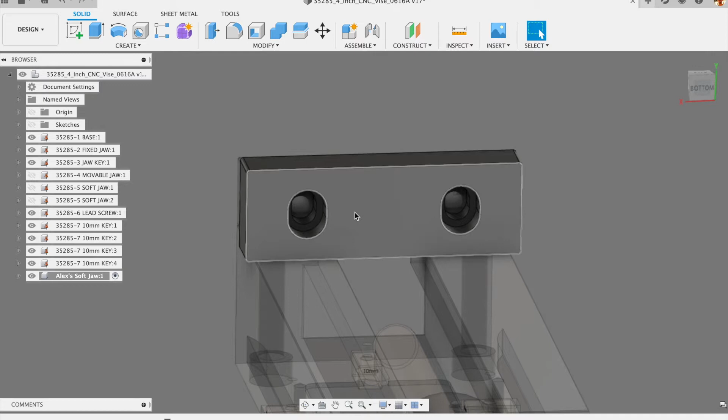Okay, this is the sequel to the previous video I made where I showed you how to design a vise jaw for your vise. And in this case, I designed a vise jaw for a 4-inch Tormach vise. So, next I'm going to show you how to do the toolpaths and post the G-code for this.

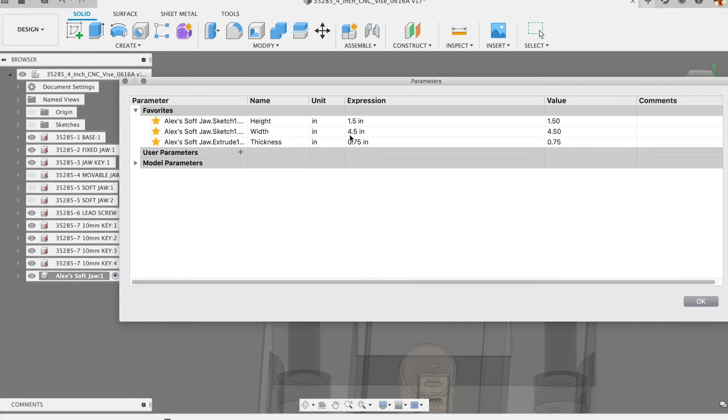So, let's see, there's a couple things since the last video that I want to change. So, modify, I'm going to go into change parameters and check the dimensions in here. So I changed the width to 4.5 inches. The height is 1.5 and the thickness is 0.75.

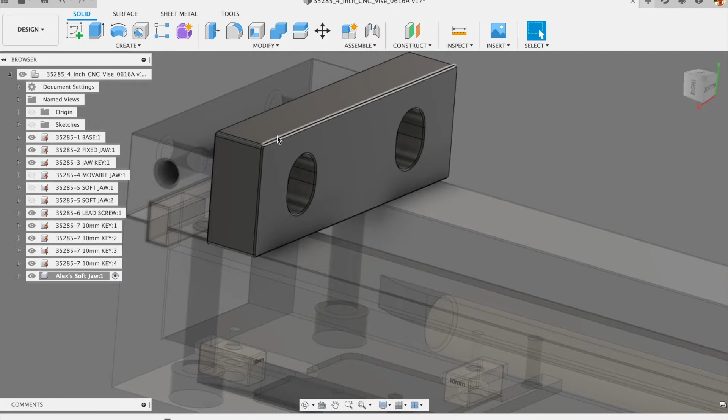And since I made that video, I also bought some material, and my material is 0.75 thick and 1.5 wide. So the problem with that I realized after the fact is you always need some material at the bottom to hold onto to machine your part. So that leaves me really no material to hold onto while I machine this part.

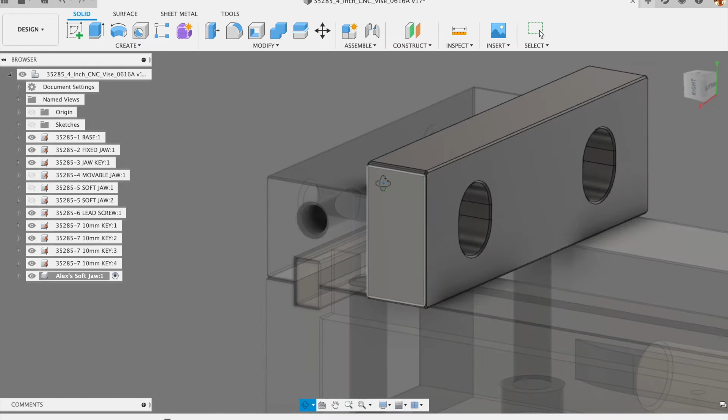So I decided rather than try to make this thinner, I don't really want it to be thinner because I want to maintain rigidity and make sure I have some material to cut into later. So rather than make it thinner, I decided it'd probably be best to just eliminate these corner radiuses, leave a saw cut at the ends, and then just make it not quite so pretty and perfect looking.

So it'll be rough saw cuts. It's going to be rough extruded material on the top. And later I can always mill that down flat while it's on the vise. So I'm not too worried about that. So what I'm going to do here is I'm going to back up my history timeline to get rid of both those things. And then I'm just going to add a chamfer.

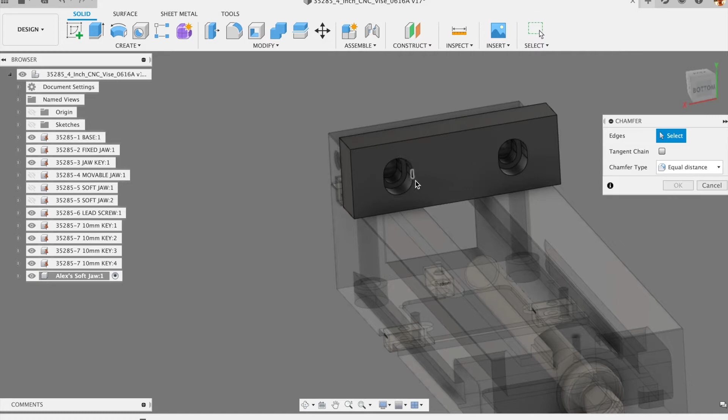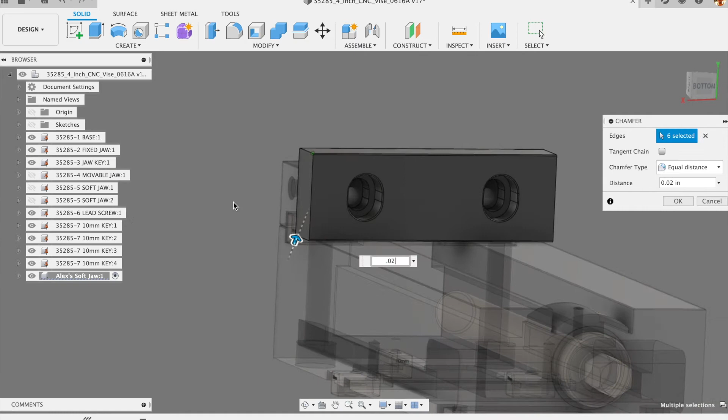So I'll add it back to these edges. And then 1, 2, 3, where is that? 4 edges. And you can make that 0.02. So that should work. So I'll still face this surface and the back side just so they're parallel to each other. I'll hit save, and I'm going to go into manufacture workspace.

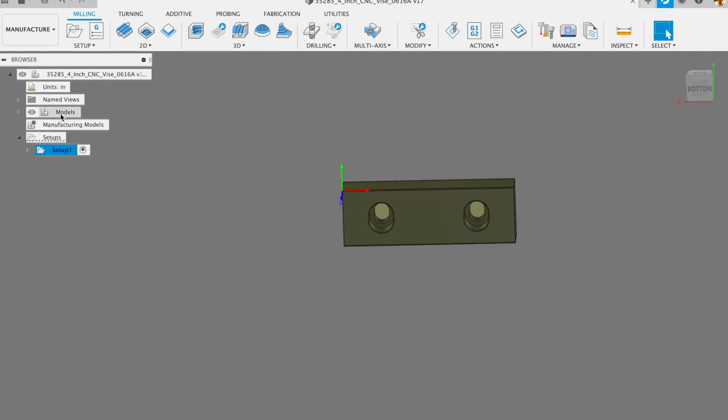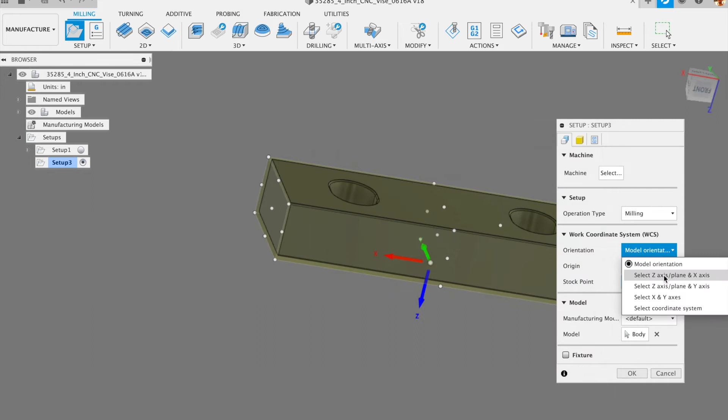So I already have a setup here, but I'm just going to create a new setup to start this from scratch. So you can immediately see my Z is pointed down and I want my Z pointed up. So it's pointed down because that's the direction that the model was built in. But I'm going to change it. Instead of model orientation, select Z plane and X axis.

So this is purely for the direction, the orientation of the axes, not the location. So I selected the face to make Z up, and then I'm not even going to select anything for X. I'm just going to flip my X axis so it's the way I want it.

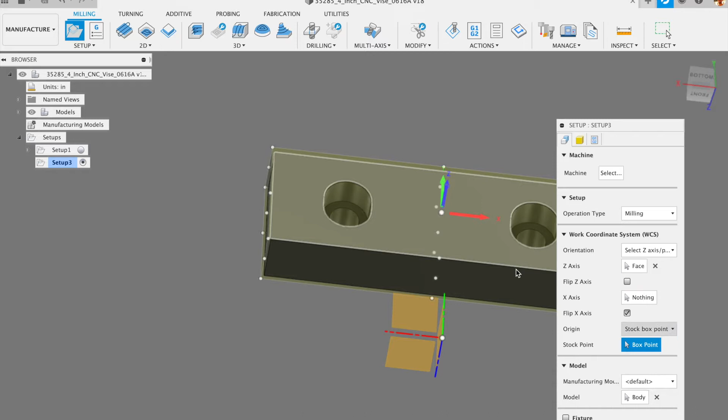Next, we have origin, and on this, I put a lot of thought into whether I should do model box point or stock box point, and that's basically either this point, which is the corner of the stock, or if I do model box point, it's the corner of the finished part. So on this one, I'm actually not too worried about it because I'm just going to say the stock is the size of the model.

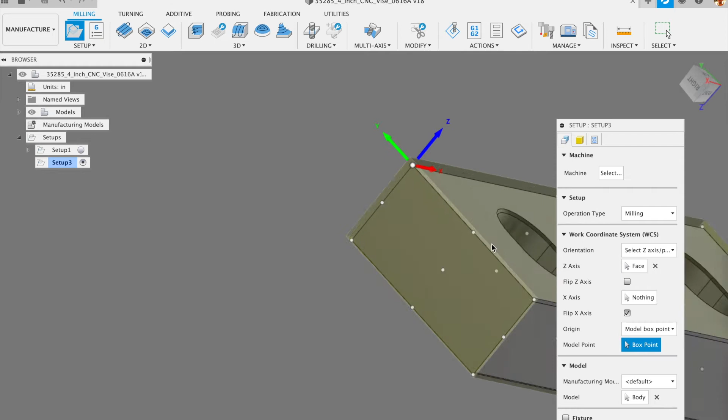Now the finished part is going to be slightly thinner than 0.75 because I need to have just a little bit of material to face off. So I'm thinking it's probably going to be 10 thousandths on either side, might have to be a little bit more than that to get a fully clean face, but I'm going to try 10 thousandths. But that does not affect how we model this or how we do the toolpaths, but it will affect how we run it in the machine. So that's to worry about later.

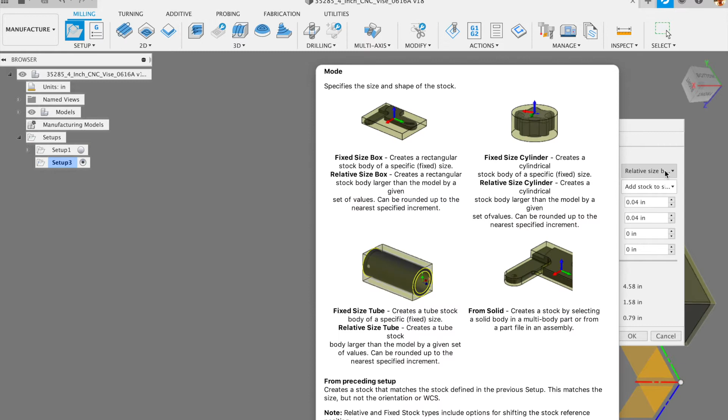So I guess I'll keep it relative size box, no additional stock. So the stock is the exact size of the model, which is these numbers here. Hit OK. Hit save. And as you can see, I'm on setup 3. I've messed with this a little bit.

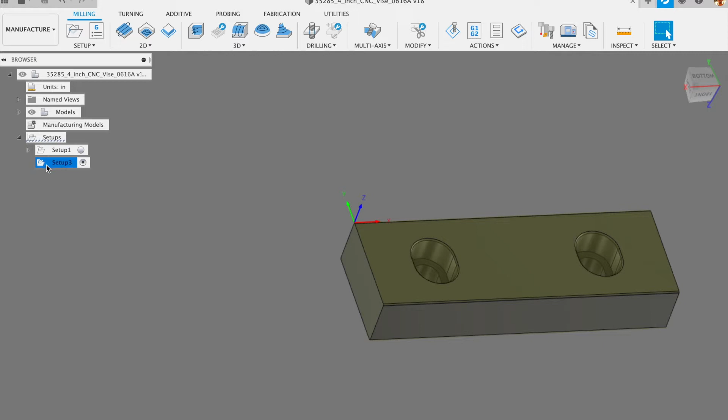So the first thing I want to do is face the top. And I'm working with a Tormach PCNC 440. If you're not familiar with that machine, it's got about the same footprint as a refrigerator.

So it's a really small machine. The nice thing about it is it goes up to 10,000 RPM. So for a small cutter, which is what I'm mostly using, I can still move pretty quickly through material.

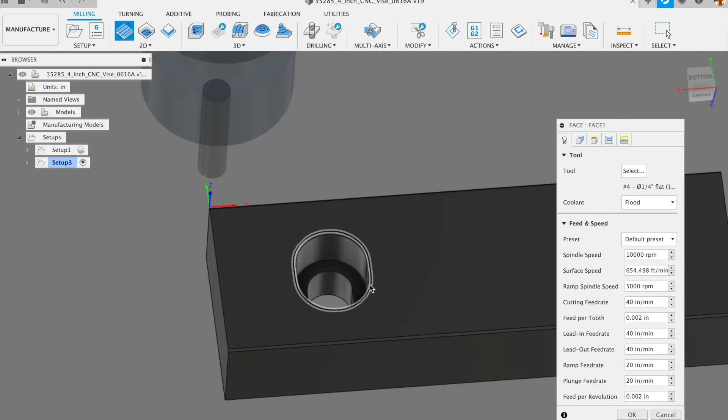Normally for facing, I'd want to use the biggest end mill possible. But for now, I'm just going to grab this 1/4 inch. Normally I would use the 3/8, but just since I happen to know that the 3/8 is not going to fit very well down in this bottom hole, I'm just going to see how the 1/4 inch does and check out how much time it takes. I'm not as worried about time as I am about convenience and having a good part.

Another factor, this is totally something about my machine, but I don't have an automatic tool changer, so I'm doing manual tool changes. So if I can save myself a tool change, that's kind of nice, especially if I want to run several of these. So geometry, if I don't select anything, it defaults to the entire stock model, so I'm just going to leave that.

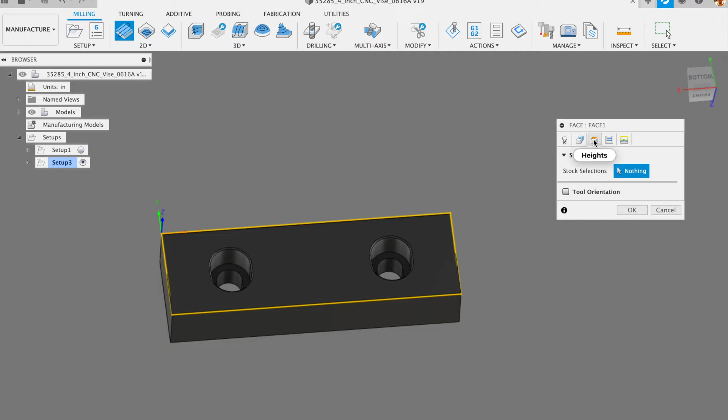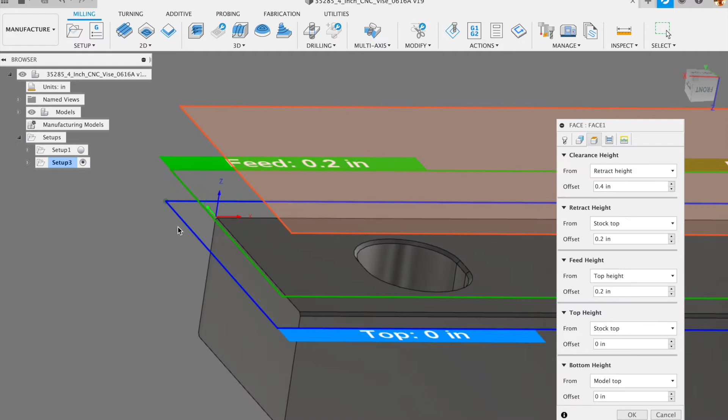Heights, the bottom height is the lowest my tool is going to go. The top height is where the material starts, so I'm going to leave both of these where they are. Even though the stock top is the model top, I'll take care of this. When I touch off the tool in the machine, I'm just going to subtract 10 thousandths and make sure that pass has enough material to clean up and leave a clean machined face.

Passes. Okay, this step over is good. So the step over, I want to make sure that's less than my tool diameter. So it is, because I'm using a 1/4 inch. Again, you might think I'm crazy for using a 1/4 inch to face a part like this, but it is a pretty small part. Let's see. I think everything else is good.

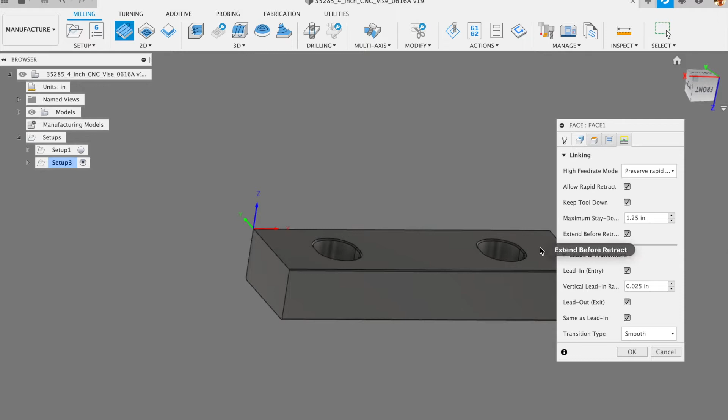Oh, I like to hit this extend before retract. And that extend before retract just is here. It makes sure, if that's not clicked, it'll lift right when it gets to this point. So I want it to fully leave the part before it retracts up. That looks pretty good. One other thing, I'm going to go back in and edit this.

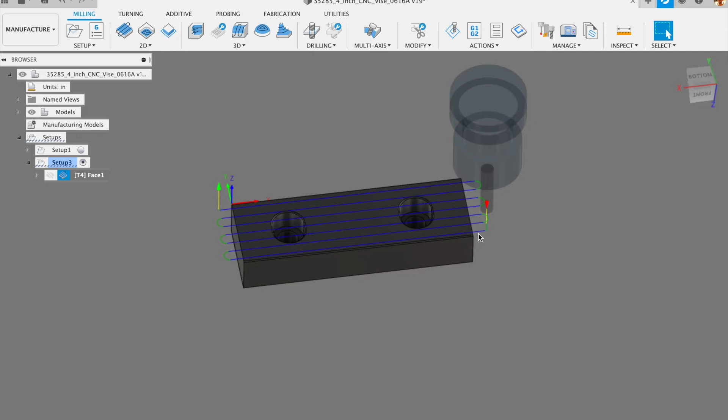I'm just going to do this pass extension. I'm going to do 0.25 just in case I cut my material a little oversized. I'm not going to do this super precisely, so if my material is just a little oversized, I don't want it to come down and plunge into the material. So I don't anticipate it's going to be this much oversized, but that little bit of feed move is not going to add too much to my time. So that worked there.

Save. And now I'm going to use 2D adaptive clearing. So 2D adaptive clearing and 2D pocket are both roughing toolpaths. And whenever possible, I use adaptive clearing because it gives you a much smoother toolpath. It lets you go full depth, and it guarantees that you're not going to exceed your maximum step over.

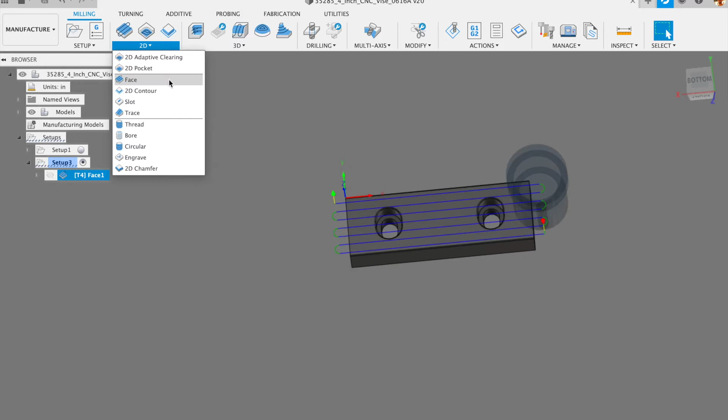Alternatively, Pocket is very similar, except sometimes the tool will go full width into the material. It's not as concerned about maintaining a consistent step over. So 2D Pocket, you have to be careful. You could break your tool if you're not careful how you use it. 2D Adaptive, you can be a little bit more careless and know that your tool is not going to break as long as you're putting in reasonable numbers.

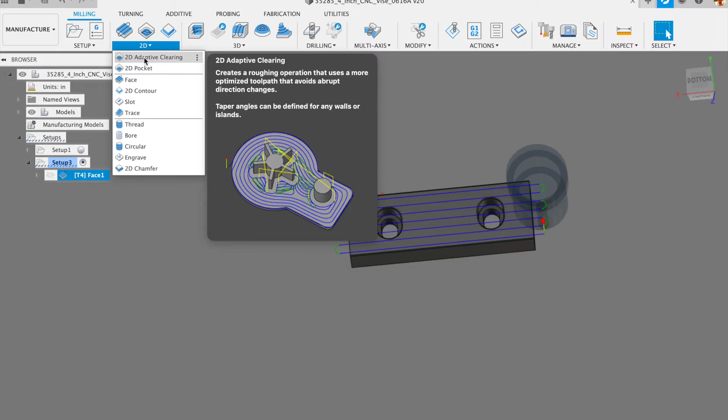So there's also 3D Adaptive and Pocket. Anytime you have a really simple geometry like I do, as far as vertical walls and a flat bottom, it's better to use 2D. It's just going to behave more predictably. So I could use a 3D adaptive, but it's going to be trying to look at other stuff that I don't really need to worry about for this simple of a pocket. So again, same tool.

All my speeds and feeds are based on the machine I have. So 10,000 RPMs. This will all depend on your machine, but if you have 10,000 RPMs, you should use that for a 1/4 inch carbide end mill.

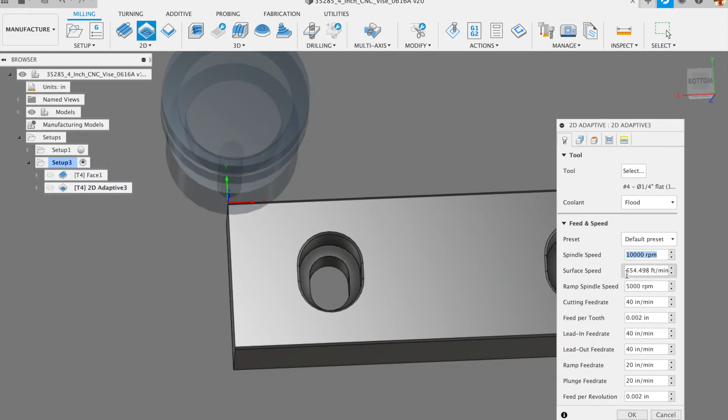Okay, pocket geometry. So I'm going to select, let's see, if I select these bottom areas, I think that will work. Heights. So the important one here is bottom height. So from selected contours, so that's where I selected down here, offset 0 inches. So that's how deep I want my tool to go, which is correct.

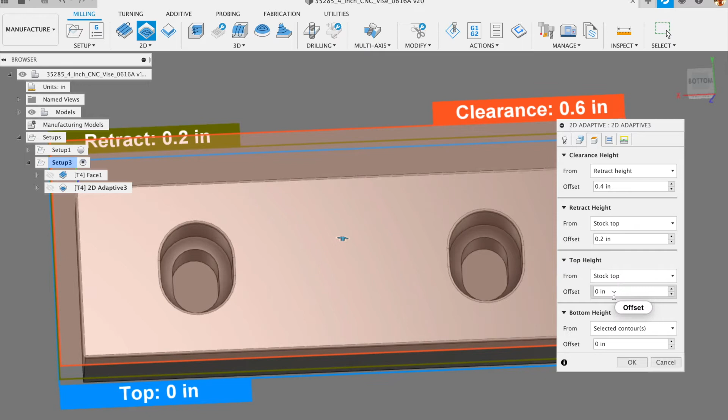Top height, usually stock top is good for most simple stuff. So you're telling it where the material starts as you're coming down in Z; that's the top height. And then retract and clearance both should be above that.

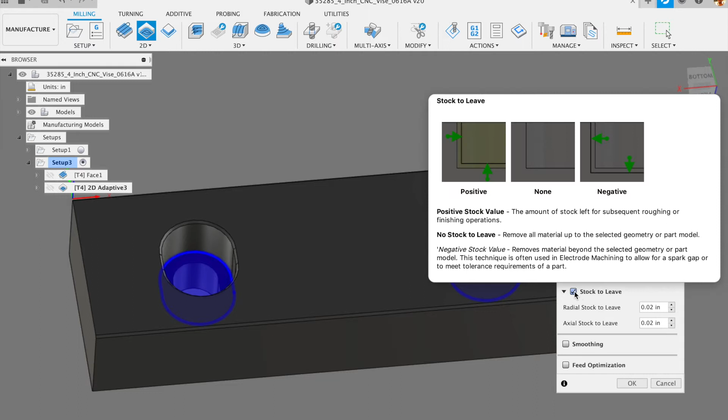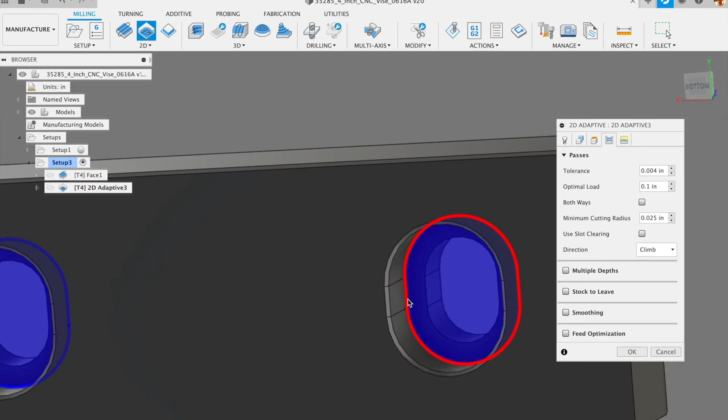Stock to leave. Normally when I'm roughing, I want to come back and do a finishing pass. For this one, I'm going to try to just leave that off. Sometimes that will give me some imperfections in the walls here, but I'm not really concerned with having perfect walls in here. So I'm just going to try it out, leave that off.

So the important number here is optimal load. You can think of this as a percentage of your tool diameter. I've seen some people say they use 50% tool diameter, some people 25% diameter. I'm going to go a little conservative here. Let's see, 1/4 inch end mill. So 10% is 25 thousandths.

I'm just going to do 0.03. No, I can do more than that. I'll do 0.05 and see how that goes. So that's 20%, right? Yeah, 20%.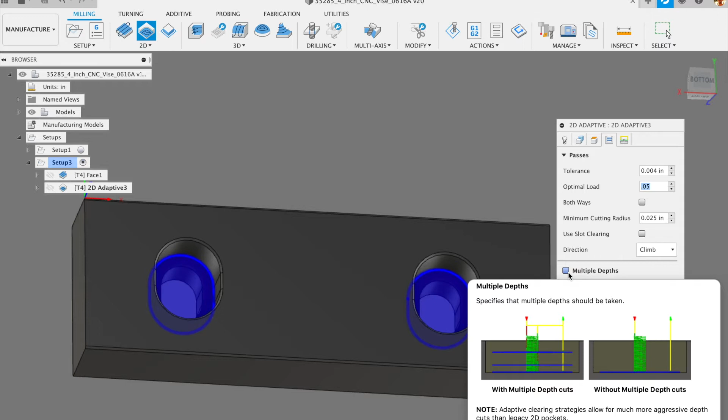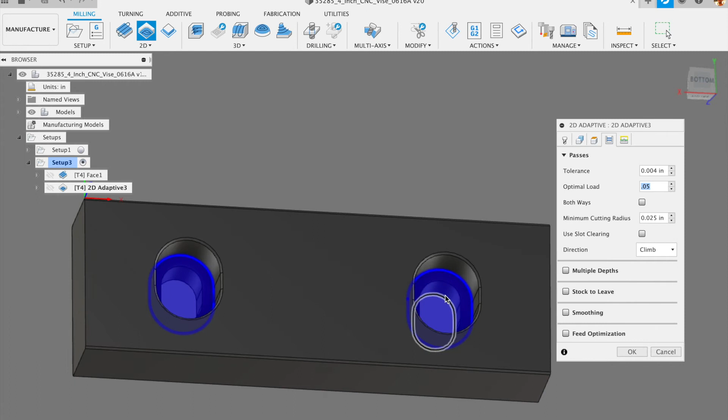And again, I don't need to do multiple depths. On a more traditional roughing toolpath, I would do multiple depths, but with adaptive, I feel comfortable that I can go full depth. This optimal load is my maximum radial engagement. So I know it won't exceed that, so I can safely go full depth. Okay. And I think everything else in here is good. I'm going to leave that.

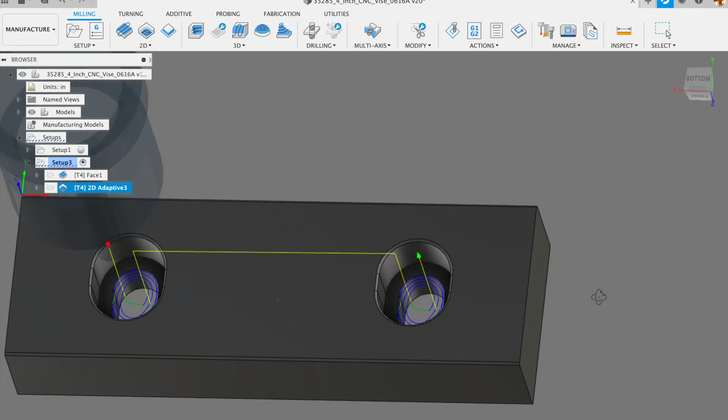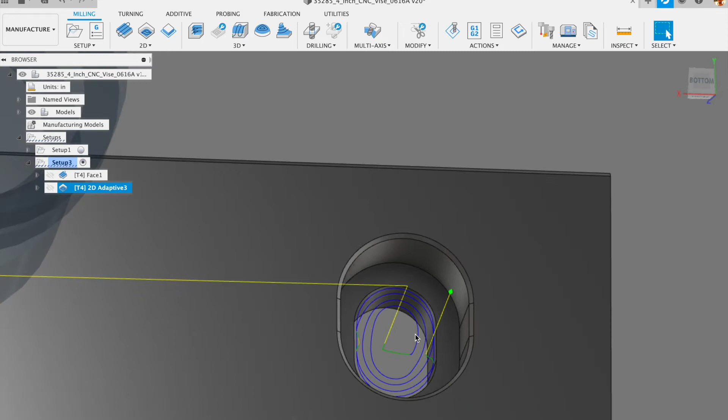Okay, and this did not do exactly what I wanted it to do, and I think I know why. I was expecting this to do a helix down to the bottom. I think the reason it didn't is because of the geometry I selected. I selected this surface, and I think it thinks, based on that, there is no material in here. So I'm going to go in, I think if I double click here, yeah.

Reselect my geometry. Rather than this surface, I'm just going to do the edge, and hopefully that picks up everything inside that edge. So here we go. And yes, that did. So it does a helical entry all the way to the bottom, which is the best way to plunge. You don't want to just take the end mill and use it like a drill and go straight in. That's harder on the end mill, even though it is possible.

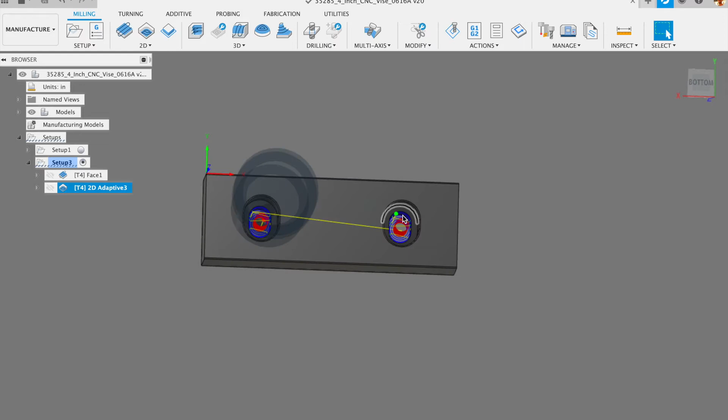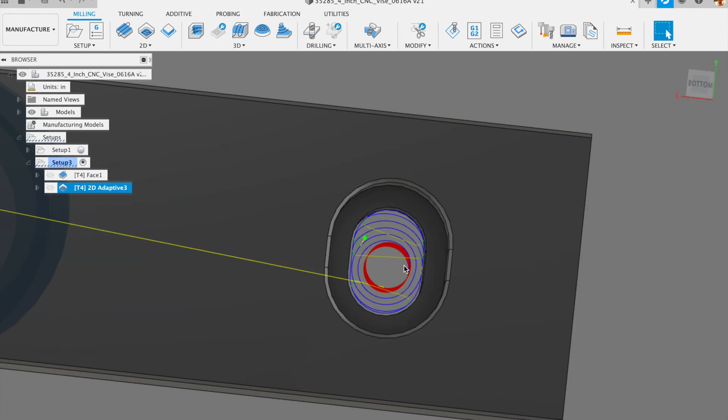So save there. That got me down to this surface. Now I need to break through down here. Normally I would always use adaptive clearing. Since I've tested this out before, I already know that adaptive clearing will not work because of this helix diameter. I could make a really tiny helix diameter, but to do a helix into this hole is difficult. So I found already that 2D Pocket does work well in this case, which usually I try to avoid, but I'll show you how this is going to work.

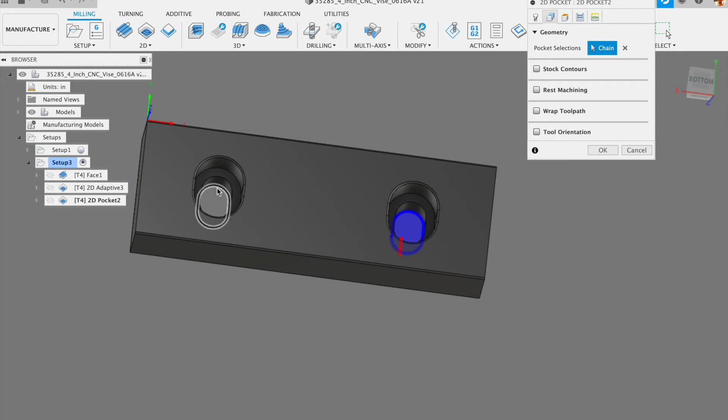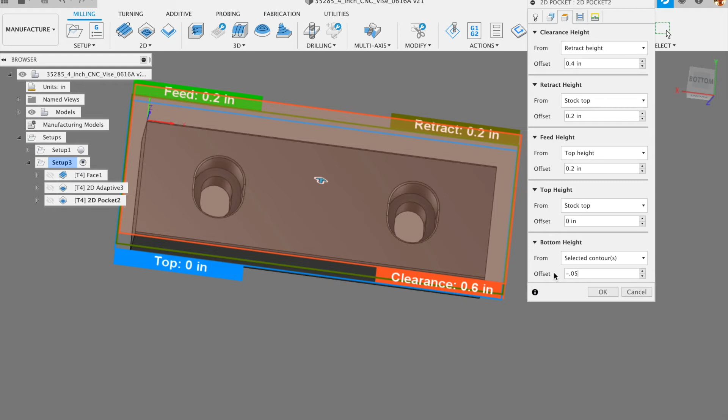So I'm going to select both these bottom edges. Again, that's the same tool, 1/4 inch. Bottom height is selected contours, so I'm good. I'm going to break through, so I'll do an offset of -0.03. Maybe I'll do -0.05 just to be safe. Okay, I'm going to turn off stock to leave because I don't want to leave any stock. If I was concerned with cosmetics, I would leave stock and come back and do a finishing pass with a contour.

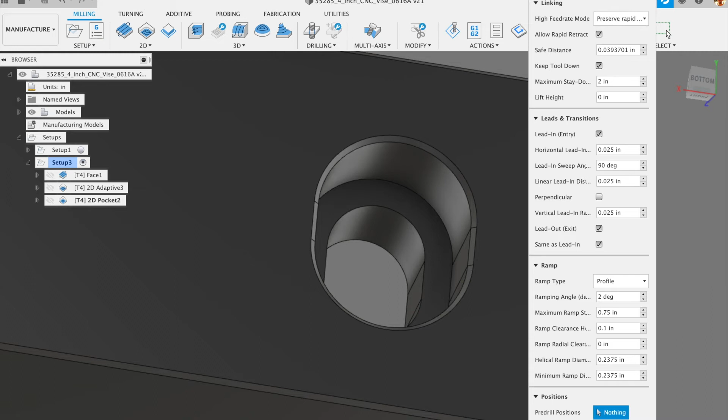Okay, let's see, what else do I need in here? I think the important one is the ramp type. Ramp is how you're going to enter the part. And like I said, the helix, I've already seen that it doesn't work here. So I'm going to do profile. Profile just follows the edge, the shape, aka the profile, and ramps down in Z as it's following that outer edge. So 2-degree ramping angle, that's all good. I'm just going to see how this looks. And yes.

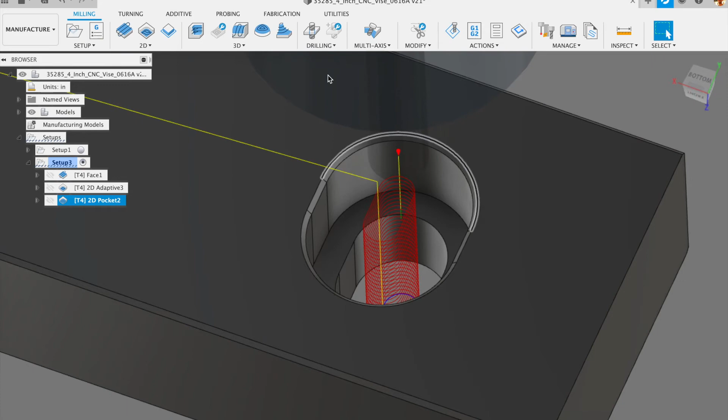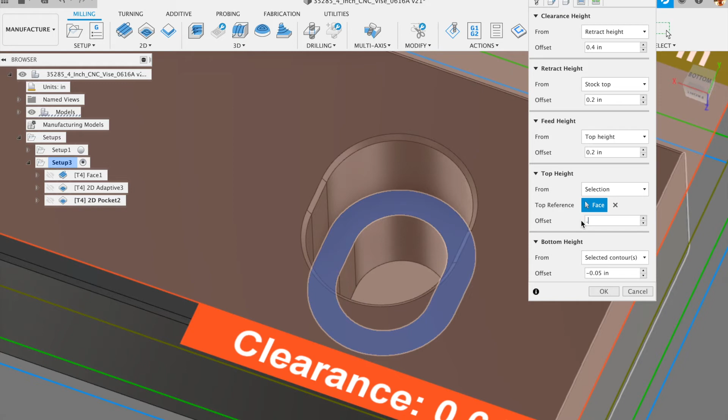Yeah, so I'm happy with that. Let's see, the one thing I'm noticing is this starts ramping at the top, and I've already cleared out all this material, so I'm going to go in and change that. So the top height, I'm going to change this to selection and click this face. And maybe just to be safe, I'm pretty sure I don't need to do this, but I'll say 0.02 offset from there.

I think it already has that vertical lead-in, so I really didn't need that extra offset. And then if I look from the side, it does break through. That's important because I'm going to come back and face off the back side, and I want to make sure that has fully cleared through and there's no paper thin edge there.

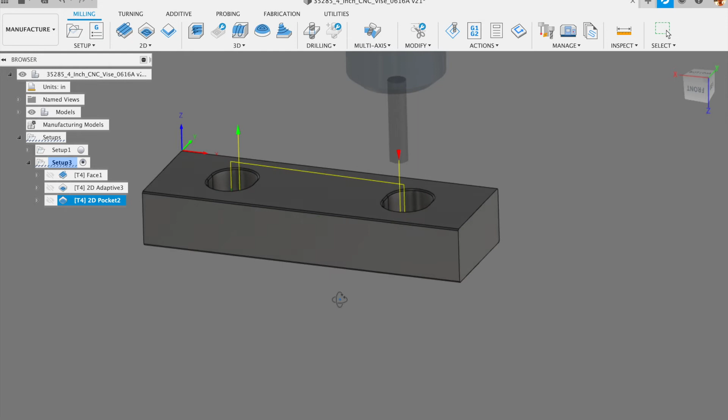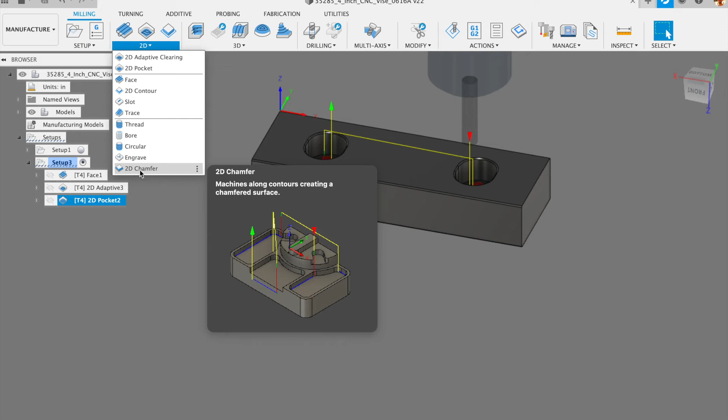Okay, so that's that. And then my last thing is the chamfers. So I'm going to go 2D. And on this one, you can see there's 2D chamfer here. And here's a secret in Fusion 360. Even though there's 2D chamfer here, and I'll show you real quick, 2D chamfer, it works. And it even says there's cutter comp here.

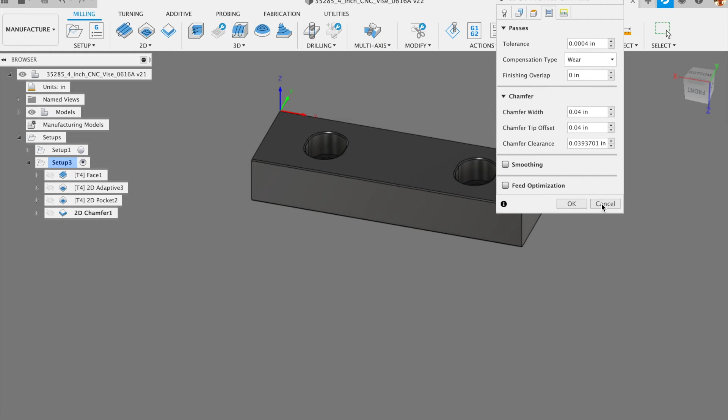But if you try this, at least the last time I've tried this, and I've seen other people mention the same thing, it doesn't put the code in your program. It doesn't put it in your G41 or G42. So even though you say I want wear compensation, you're not getting it. Hopefully they figure out how to fix that at some point. But instead, the alternate way is use 2D contour.

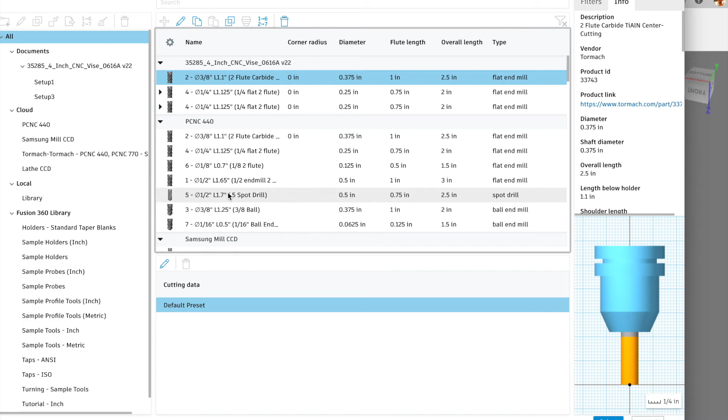So I'm going to select, I have a spot drill. Let's see, is this the one? So I'm going to use this 1/2 inch spot drill. A spot drill, it's not an ideal chamfering tool, but it actually works pretty well. So if you don't want to have to buy an extra tool and you already have a spot drill, you can use it. And it will be recognized by the CAM software as a tool that can do chamfers.

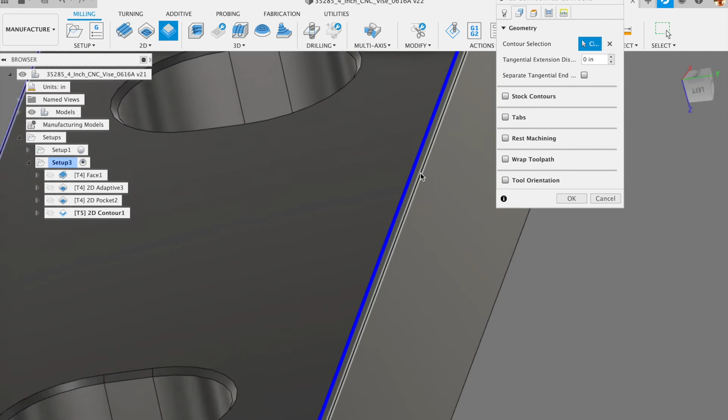So geometry, I'm going to select this edge. Oh, not that edge. Okay, here's another learning lesson. You select an edge and it gives you more than what you wanted or a different chain than what you wanted. You can reselect that edge. And now I'm going to say it's an open contour instead of closed contour. And I can select whatever edges I want to be part of that contour. And then once I got it, which I only have that one edge, I'm going to say accept. So I have that one edge.

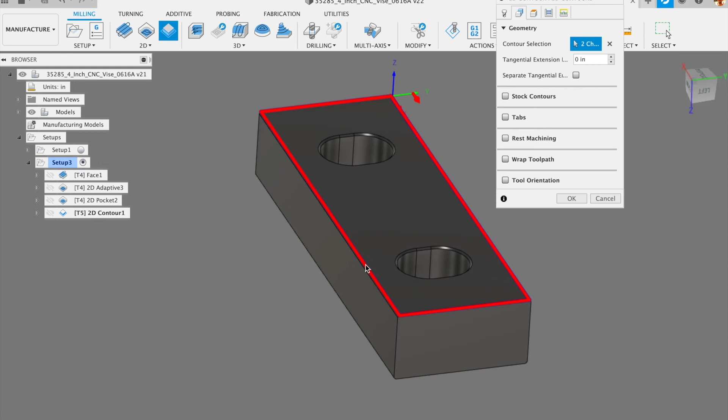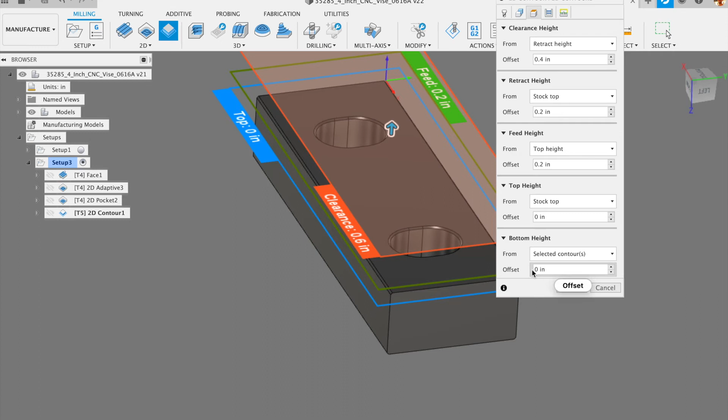Now I'm going to select this edge, do the same thing, click it again, open contour, just the one, accept. And now I'll do these top edges. So make sure you're clicking the top edge of the contour in all these cases. And bottom height, just leave it at selected contours, that works. Okay, so now here's where the magic kind of happens. Since we're using a chamferable tool, this chamfer box pops up. So it seems to know that we want a chamfer.

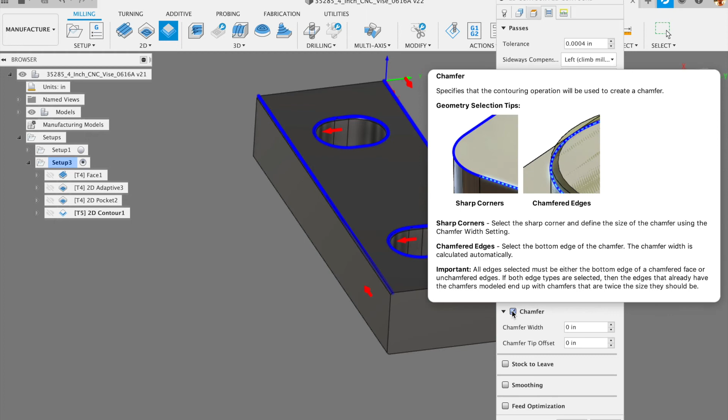And if your chamfer is already modeled, you can actually use a chamfer width of 0, and it will give you the modeled chamfer size. So if you put a number in there, let's say I put 0.05 or something, it's going to do an additional 50 thousandths from what I already have of chamfer. So if the chamfer was not modeled, I would select that edge and say 20 thousandths. But it is modeled. I'm going to say 0.

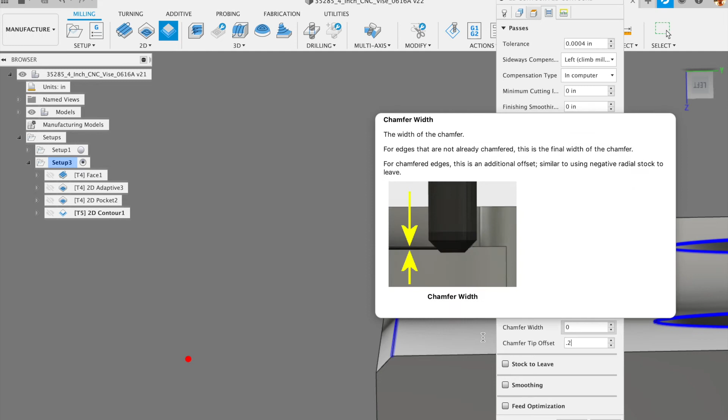Chamfer tip offset, I want to be closer to the top of the tool, away from the tip, so I'm at a larger diameter where I'm actually cutting. So this is a 1/2 inch spot drill, and on a 1/2 inch spot drill, the tip length is 0.25, so I'm going to do 0.2, and that should get me higher up on the cutting edge.

Okay, one more thing. Compensation type, I'm going to do wear compensation. So if you're not familiar with wear compensation, that's where we're using very small numbers to offset our toolpath rather than the full radius or diameter of the tool.

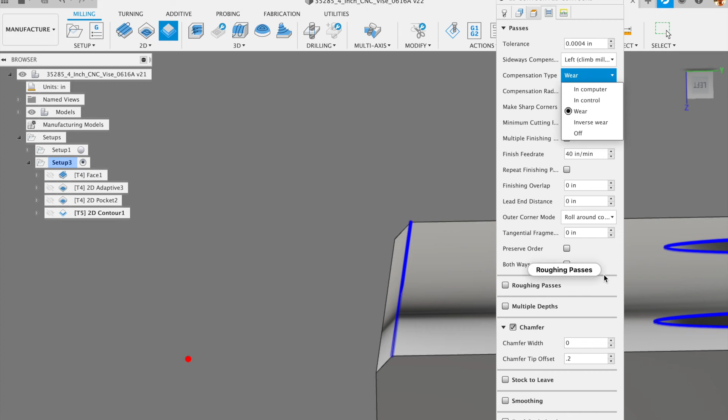And I like to have compensation when I'm doing chamfers because chamfers in general are usually a pretty cosmetic thing, and I like the ability to cut a smaller chamfer, look at it, see how it looks, and then maybe make it a little bit bigger. I kind of like the ability to modify it on the spot on the machine. And wear compensation allows me to do that.

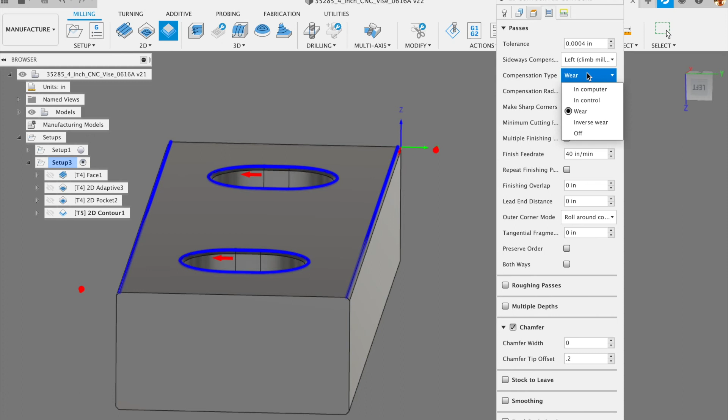Let's see, horizontal lead in. I'm going to do a little bit bigger. I'll do 0.25. And let's see, anything else in here?

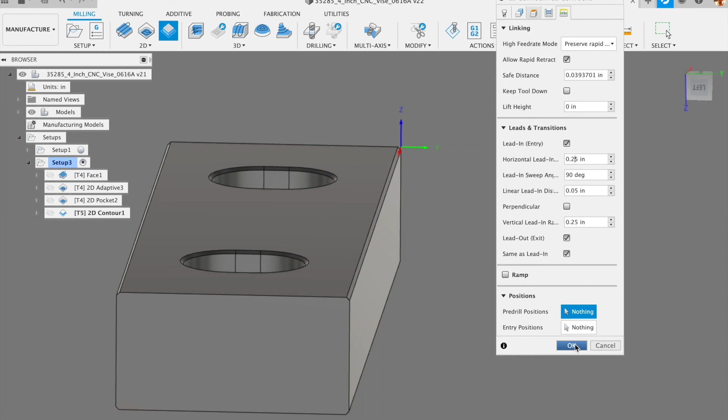Yeah, I'm just going to leave all of this now. Okay, so I remember I selected all 4 of these as geometry, and it's not showing it on the inner ones. I have a warning here. That probably has to do with my horizontal lead-in radius. So let's make this 0.1. And I like to keep this vertical lead-in radius small, so I'll do 0.05 for that. See how that goes. Okay, so now I got my chamfers on all of those.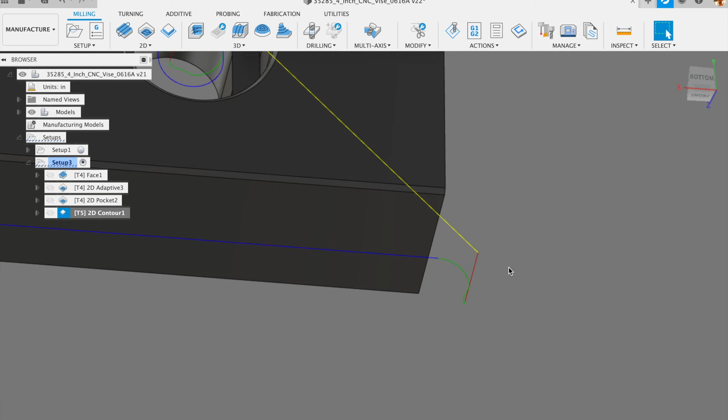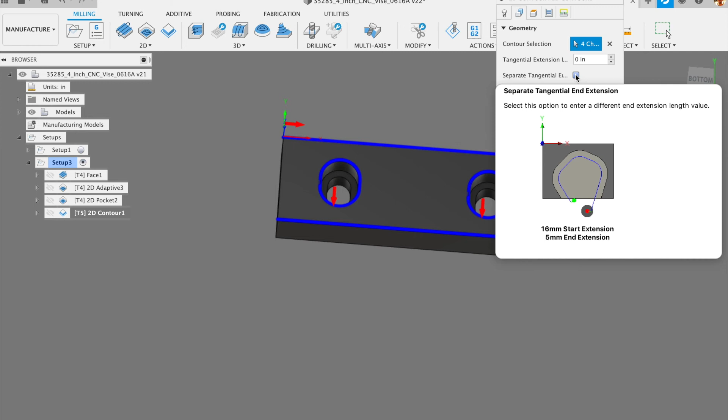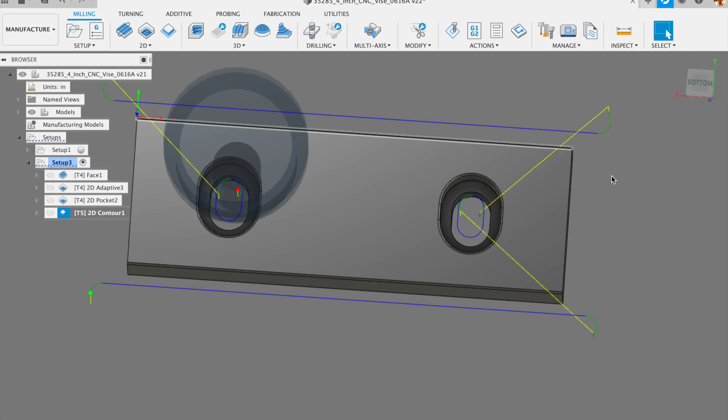So the one thing I'm thinking about is if I do slightly overcut the length of my material, this chamfer might kind of taper off. I could use 2 different chamfers and extend that, but let's see, how would I do that? Geometry, yeah, you could do a tangential extension. Let me just see what would happen if I did 0.25 here. Okay, yeah, that seems to work. So yeah, that's the solution right there, that tangential extension. I think it messed with these inner ones, but I think that's okay.

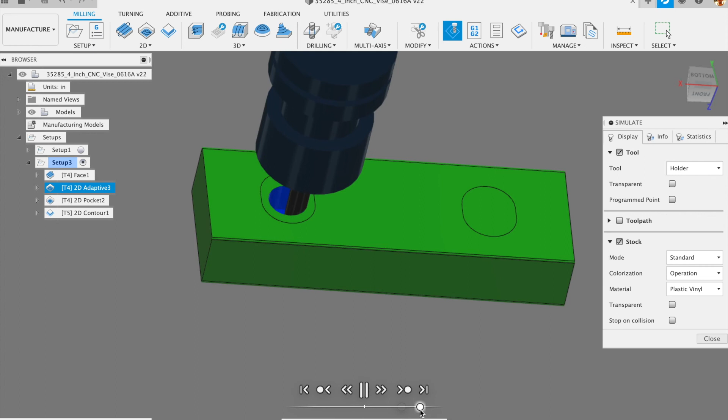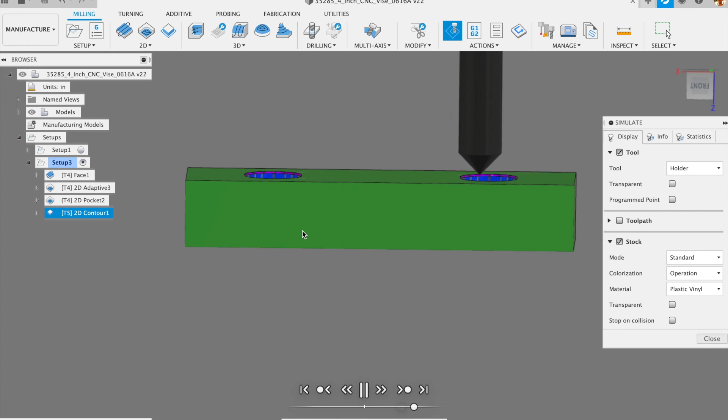So save. So that's all the toolpaths I want. I'm going to really quickly simulate those just to make sure it's doing what I think it should. I like to turn off toolpath, turn on stock, just so I can watch it clean it up. Okay, speed it up a little bit. Okay, so that looks good to me.

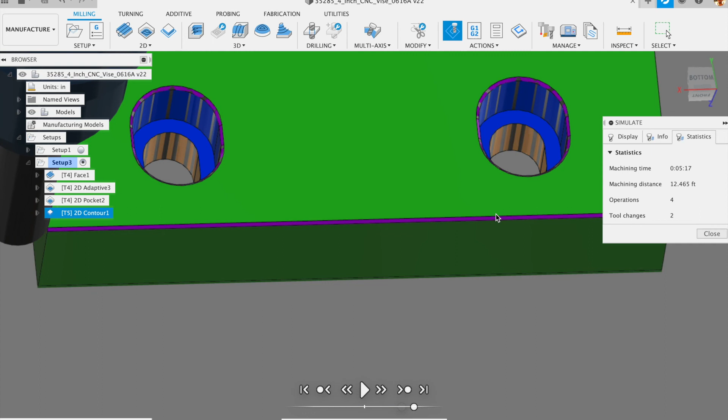I always like to look at my statistics, see how the machining time is. So it's 5 minutes. That's kind of long for a part like this, but again, I'm working on a very small hobbyist kind of machine. So in that case, I think that's fine. I'm not in a hurry. So I'll just say good to that.

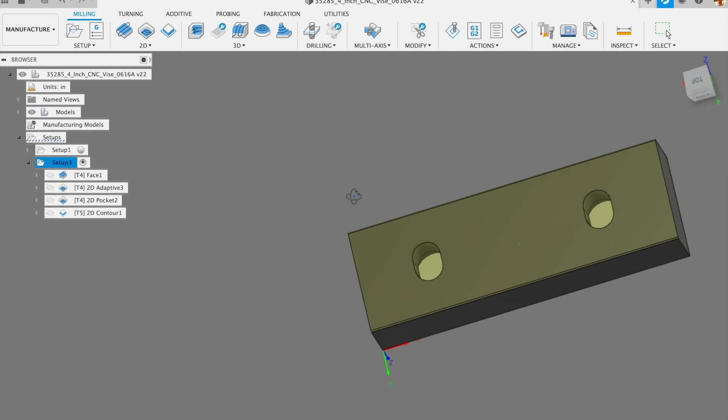Okay, so last thing, if I want to post out my code, and here's another thing. I can use the same code to do the backside because it's the same facing pass and then the same chamfer. So actually there's only 2 of those chamfers. So I can modify this code for the backside. So I'm not going to do the full code again for the backside.

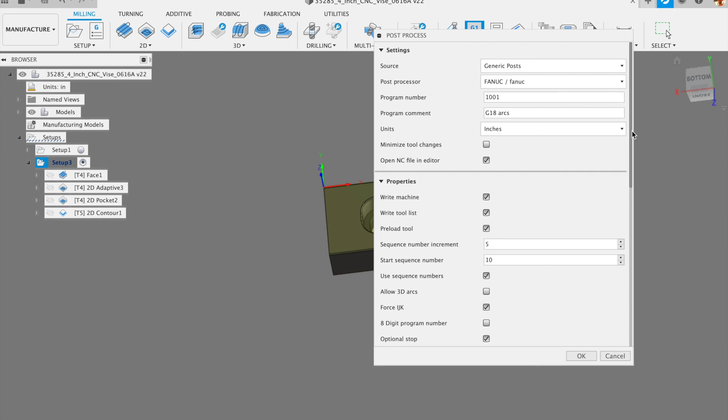So now you're wondering how to get the code out of the machine. There's two ways to do it. The quick way to do it is just right click on your setup and post-process. The reason that's not the better way to do it is because there's a bunch of... So if you're on a Windows machine, this stuff all looks a little different in these windows. But all this stuff that you might change in here, you'd have to do that every time you post this code. And in most cases, when I'm writing a program, I post 3 to 10 times until I get the code right, until I'm happy with it.

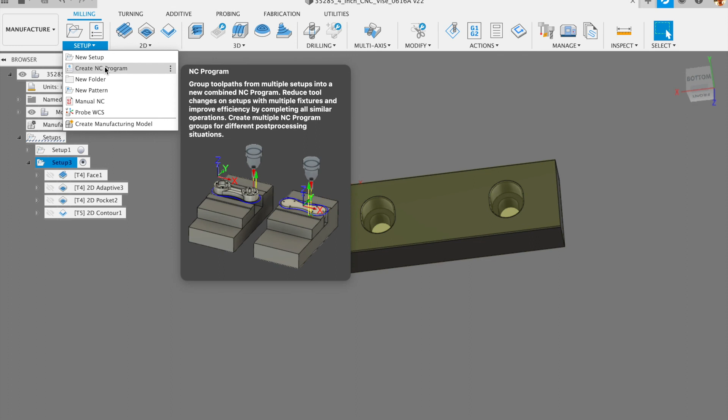And so I don't want to have to go to post process every time I'm like, oh, I messed up something, I want to change that really quick. I don't want to have to change all those defaults. So the better way to do it is go create NC program. Then you only change those defaults once. So I'll leave my program 1001. Okay, so I'm posting to my desktop. I want to change my post processor down here. So you can see there's a lot of them. I'm going to go to Tormach PathPilot.

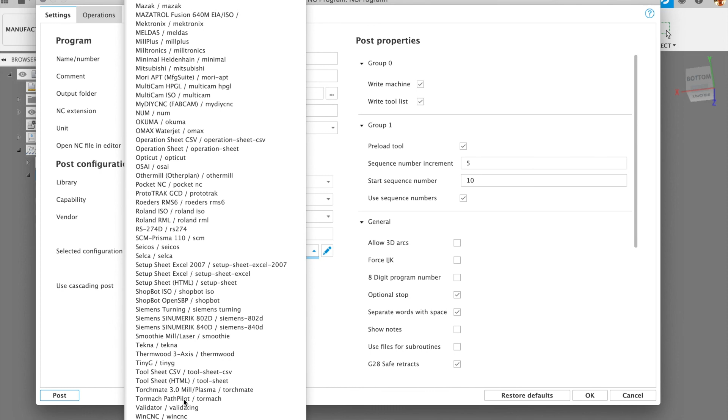And then let's see, what do I want to change in here? So I have all these options of things I can change. And I think all this is good for me. So depending on which post processor you pick, these properties are going to be different. But in general, I like to not use sequence numbers, so turn that off. And in most cases, the rest of the stuff is good for me, so I don't change it.

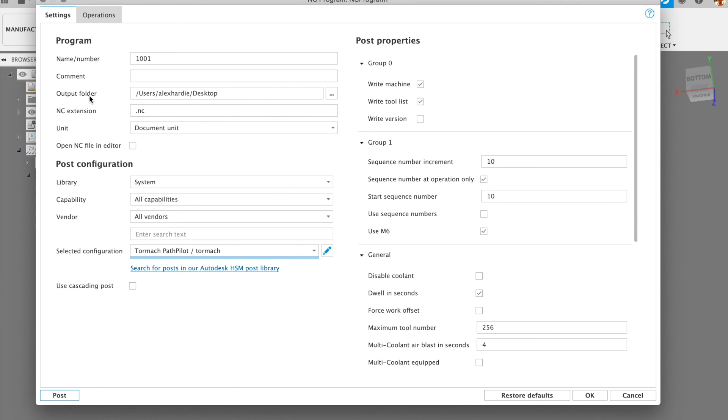And then you can double check your operations. It should be the ones you just did. I'm going to hit OK. And now I can right click on that, post process. And then if I click view NC code down here once it's done, it'll pop up.

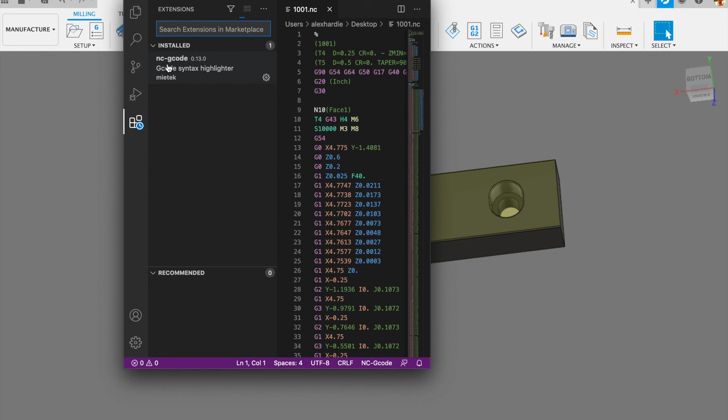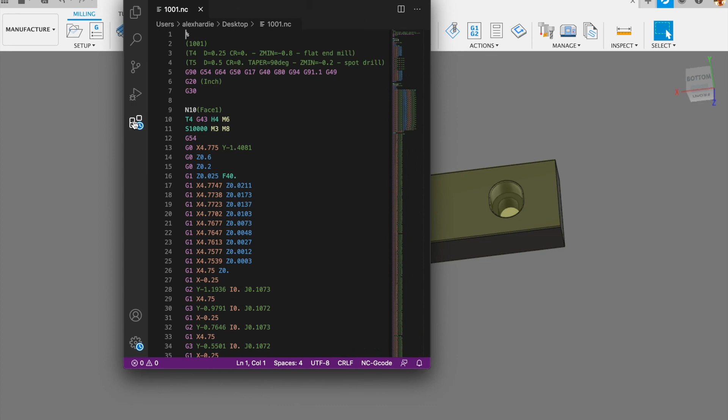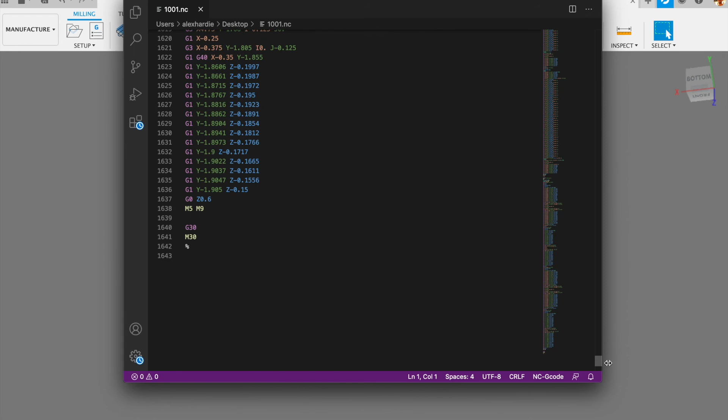So if you're wondering how I got this colorization, this is, what's it called? Visual Studio Code. If you click over here, there's several G-code highlighters. I use this NC G-code version 0.13.0. You search for that, install it, and then make sure that's active. Your code will look pretty like this. So that's my code. I can now put that in my CNC machine and run my part. And that's it.